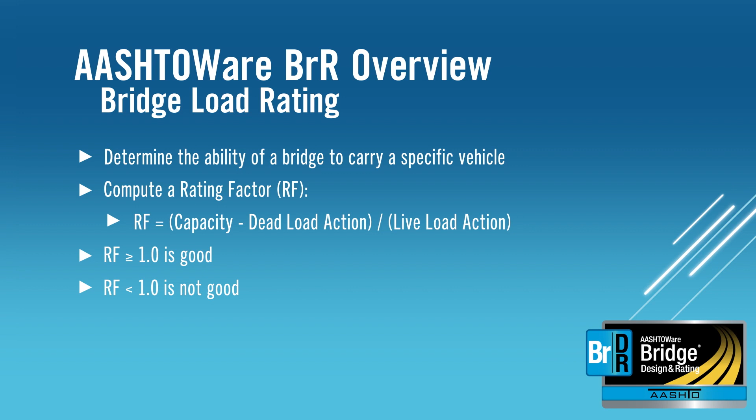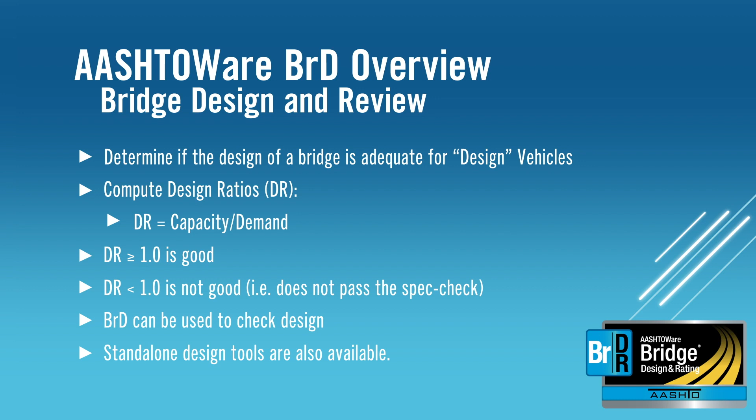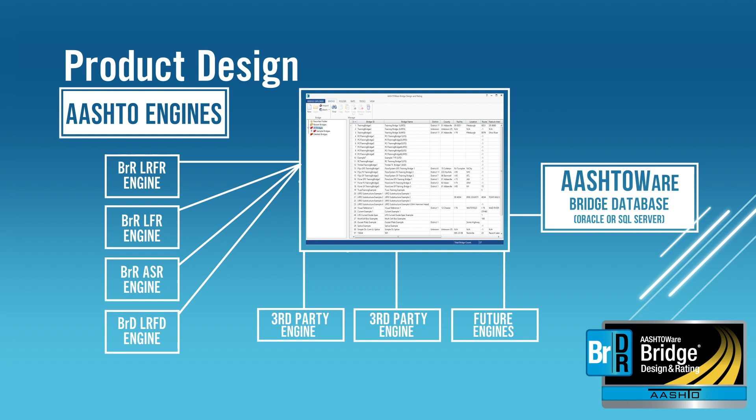This slide shows a representation of the general architecture of the system. In the center is the user interface where the user enters data describing the bridge. The data that a user enters is stored in a database, which is either Oracle or Microsoft SQL Server. The database is designed to hold a three-dimensional description of a bridge. Having three-dimensional data entry allows the data to be used by multiple analysis engines and multiple versions of the specifications without needing to change any input. On the left-hand side are the AASHTO engines delivered with the software, which are LRFR, LFR, ASR, and LRFD analysis engines. Third-party engines such as BRASS and LARS, for example, are also supported. The results generated by the analysis engines are viewable within the user interface.

This slide outlines the analysis process in the software. In the first step, the user input represents the physical model of the bridge with dimensions and material properties. Then the user launches an analysis which generates a mathematical finite element model of the bridge from the physical model. The finite element engine processes the finite element model and determines the displacements and actions such as moment and shear acting on the structure. For vehicular loads, influence lines for 2D analysis and influence surfaces for 3D analysis are loaded to determine the live load actions on the structure. The next step is spec checking, which uses the physical model to calculate the capacity at each requested location to determine either the rating factor or the design ratio based on the analysis request.

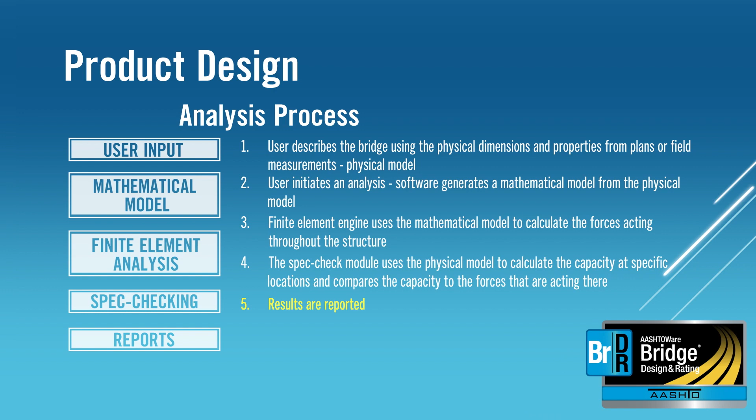Reports are generated based on each of the analysis and reports requested through analysis. The development cycle for new features in the software starts with task force approval and requirement gathering. Design documents such as UI mockups and flowcharts are then created. The task force and BETA TAG, which is a technical advisory group composed of state agency employees who use the software, reviews and approves the design documents.

Software development then starts, and is alpha tested using agile software development methodology. Alpha testing is performed by engineers with bridge load rating and design experience. The software is then tested by the BETA TAG. After all features have been alpha and beta tested and the BETA TAG approves the acceptance build, a new version of the software is finally released.

AASHTOWare BrDR supports the Microsoft SQL Server and Oracle relational databases. The language used for development is C# with .NET Framework platform. All data entered by the user is stored in database tables. The system contains more than 1,000 windows, more than 800 database tables, and more than 10 million lines of code.

Now we will discuss the 4 major components of the software, which includes the Bridge Explorer, the Library Explorer, the Configuration Browser, and the Bridge Workspace. The Bridge Explorer is designed like the Windows File Explorer, with folders shown on the left-hand side and bridge files on the right. The bridges are organized as a list by their bridge IDs, which can be subdivided into different folders. There is a search feature to find bridges based on a few identifying criteria.

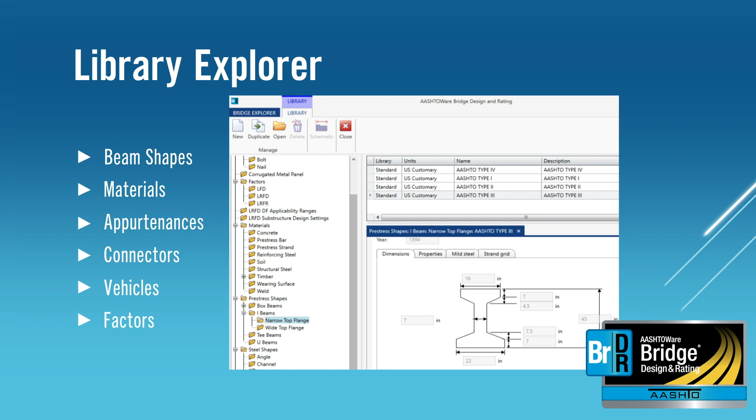The library also contains materials from the AASHTO standards and vehicles based on the LRFD design specifications and the Manual for Bridge Evaluation. The library also contains load and resistance factors from the LRFD design specification and the Manual for Bridge Evaluation. The Configuration Browser is mainly used by administrators of the software. Administrators can add users, set privileges, and enter parameters such as names of counties and districts. Administrators can also enter agency-related system defaults, like the default specification to use and tolerances.

The Bridge Workspace is where all the work is done related to defining components of a bridge, defining the bridge geometry, and analyzing a bridge model. As mentioned before, the 3-dimensional model of the bridge can be entered. In this system definition model, all the loads acting on each member can be computed by the software. The software also computes the live load distribution factors for each member based on the relative location of the member.

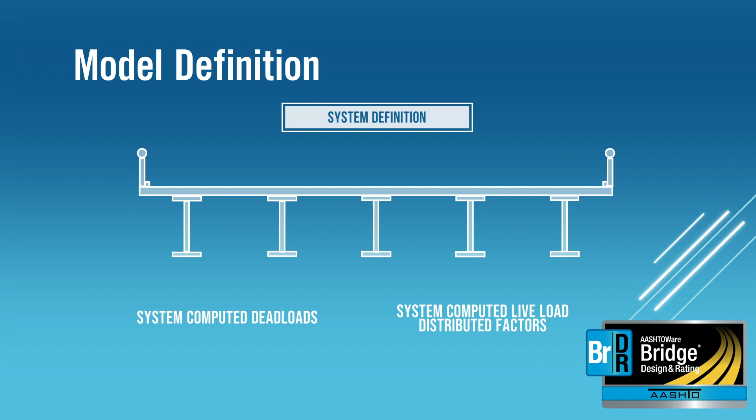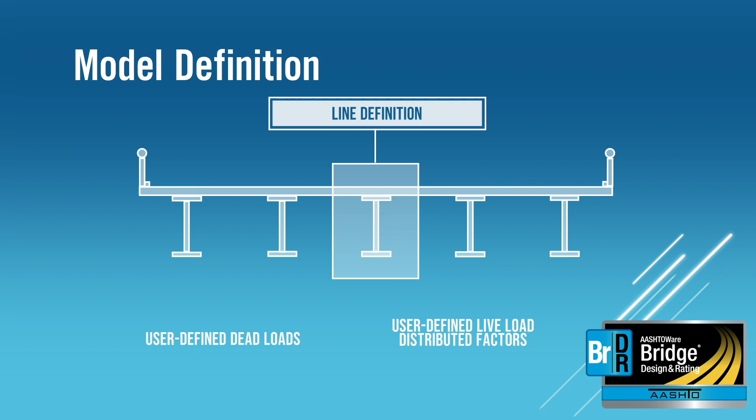For the few types of bridge geometries not supported by the software, a line definition model can be used. In a line definition model, the user is responsible for entering the dead loads and the live load distribution factors. Now we will talk about some of the capabilities of the software. The software can compute LRFD design review or design, capacity computation using LRFD and rating with LRFR, capacity computations with LFD and rating with LFR, and capacity computations using ASD and rating with ASR.

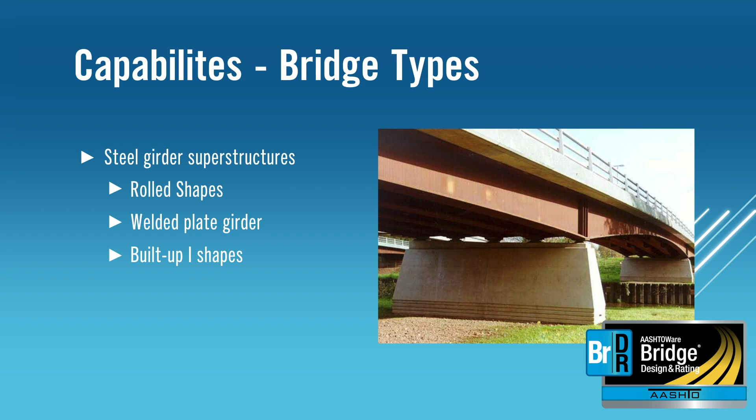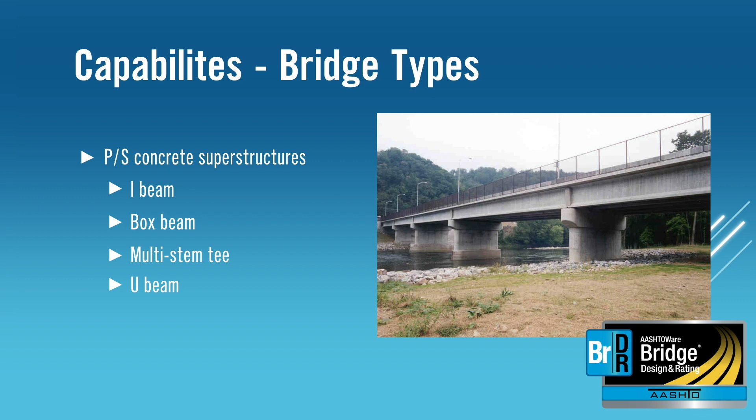A member alternative analysis setting allows the user to specify a load rating type, such as LRFR, LFR, or ASR for each member alternative, and then launch an analysis where some members of the bridge are rated by one method, such as LRFR, and other members of the bridge are rated by another method, such as LFR. In terms of steel bridge types, BrDR supports rolled shapes, welded plate girders, and built-up I-shapes. For prestressed concrete beam types, BrDR supports prestressed I-beams, box beams with both rectangular and circular voids, multi-stem T and U-beam shapes.

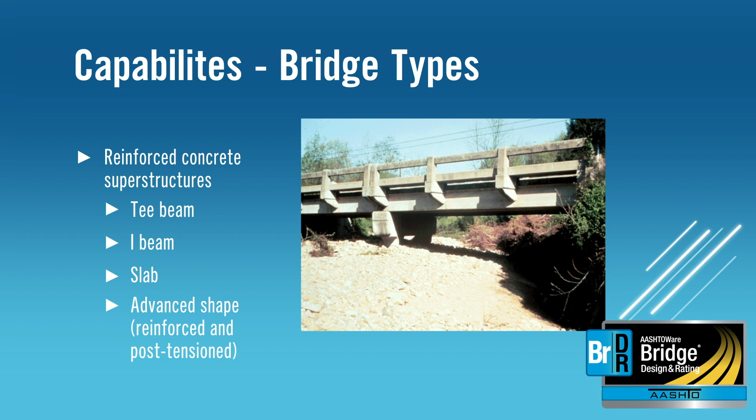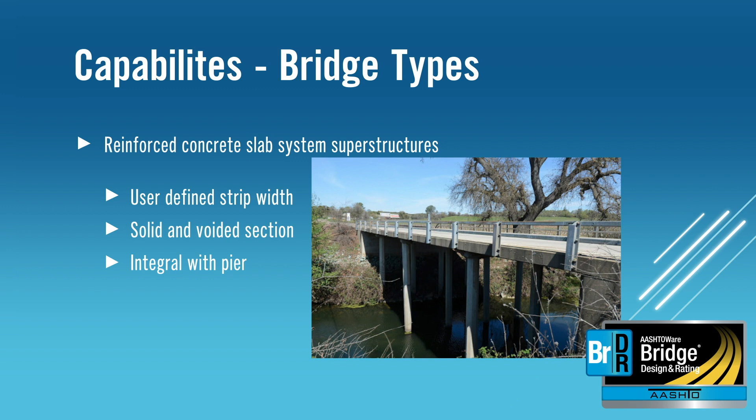For reinforced concrete beam types, BrDR supports T, I, and slab beams. From version 7.1 onwards, it will also support a reinforced concrete advanced shape, which can either be reinforced concrete or post-tensioned. BrDR also supports reinforced concrete slab systems with solid and voided sections. A user-defined slab strip width can also be defined for evaluation, for which the live load distribution factor and the load will be proportioned. Slab integral with pier is also supported for analysis.

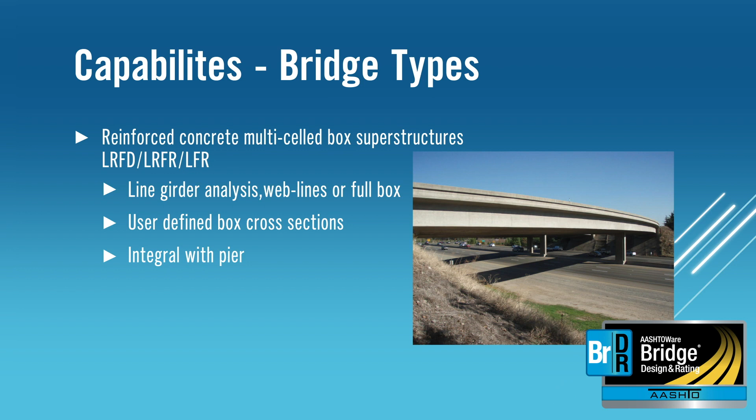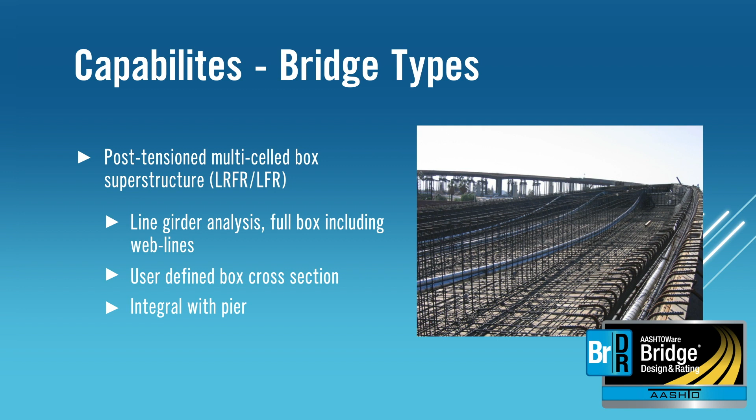Reinforced concrete multi-cell box is supported for LRFD, LRFR, and LFR. Either web lines or the full box can be analyzed. Multi-cell box also supports analysis with integral pier. Post-tension multi-cell box is also supported for full box along with web lines evaluation. Post-tensioned multi-cell box also supports integral with pier analysis.

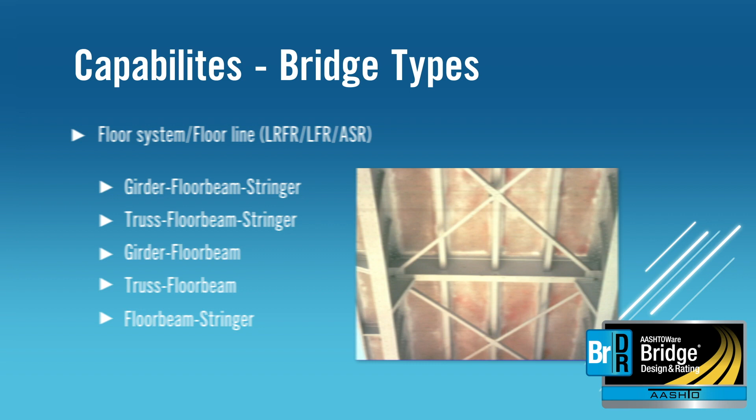Analysis of floor system bridges is also supported for LRFR, LFR, and ASR analysis. The following floor system configurations are supported in the form of system or line superstructure definition: girder floor beam stringer, truss floor beam stringer, girder floor beam, truss floor beam, and floor beam stringer. Floor truss in floor system is also supported for LFR only.

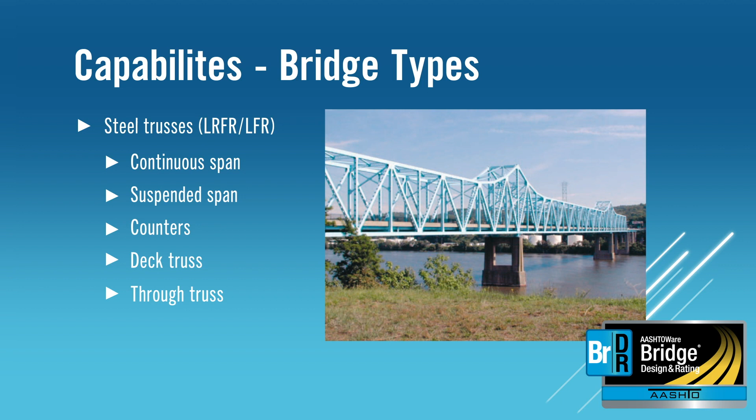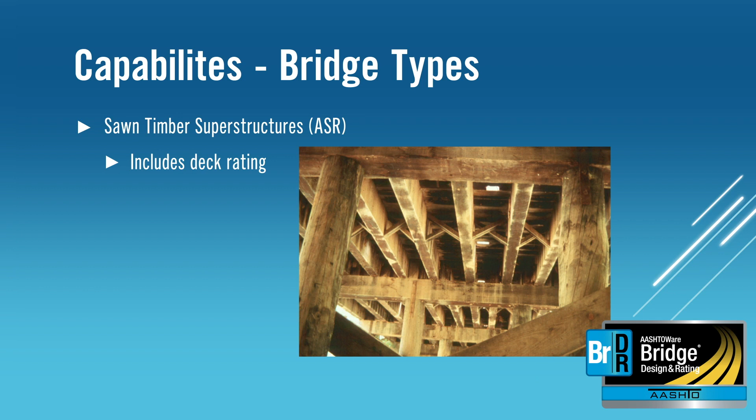Steel truss bridges can also be evaluated for LRFR and LFR. The following types of steel trusses are supported: continuous span, suspended span, truss with countermembers, deck truss, and through truss. Sawn timber beam analysis is supported, including timber deck rating. This analysis is only supported for ASR. The timber analysis is performed using the third-party engine Madero.

Reinforced concrete box culverts are supported as well for LRFD, LRFR, and LFR analysis. Configurations with sloping fill multiple cells are supported. The software also supports culverts with or without bottom slabs and haunches.

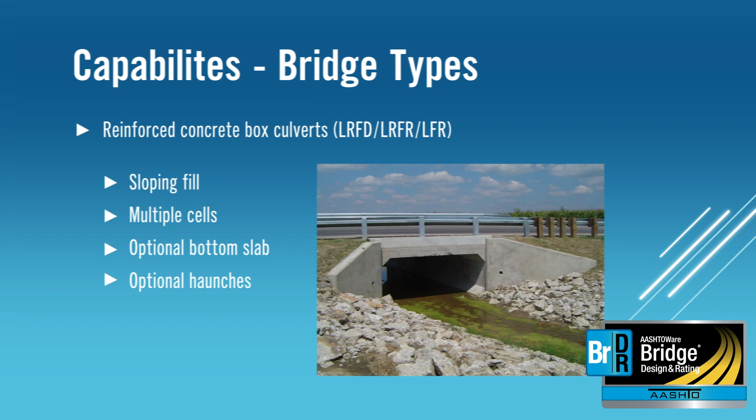The BrD application also supports pier design review analysis for multi-column frame piers, solid shaft piers, pile bent piers, and wall piers. Foundation types include spread, pile, and single drilled shaft foundations. Foundations are not added to the FE model but are evaluated for specification checking. Nonlinear analysis is performed for single drilled shaft foundations.

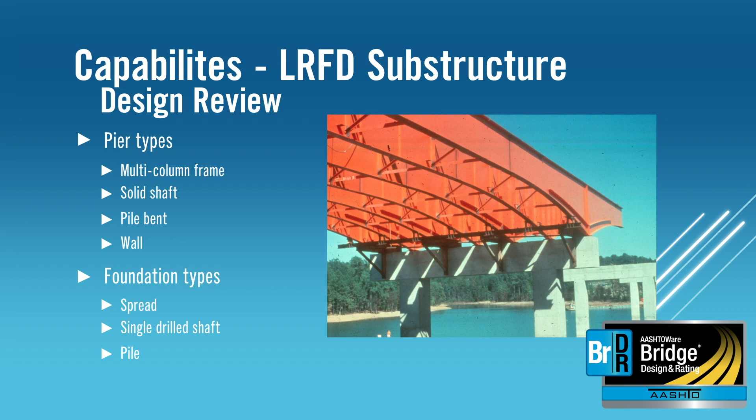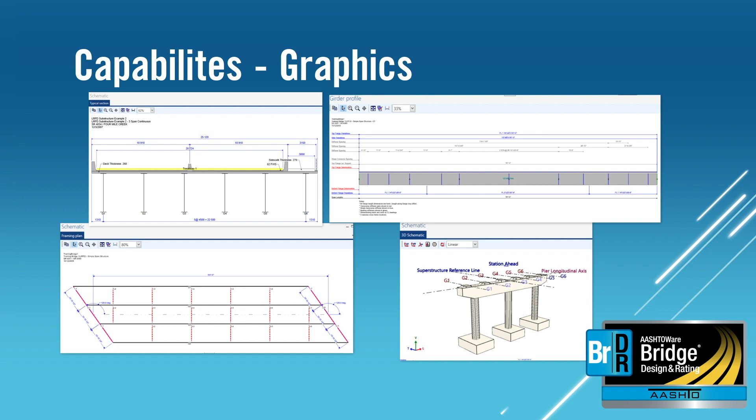The software provides graphics to validate entered bridge models as seen here. The top left is the structural typical section, followed by the member elevation on the top right, the framing plan on the bottom left, and a multi-column frame pier on the bottom right corner. There are other additional schematics available that are not shown here.

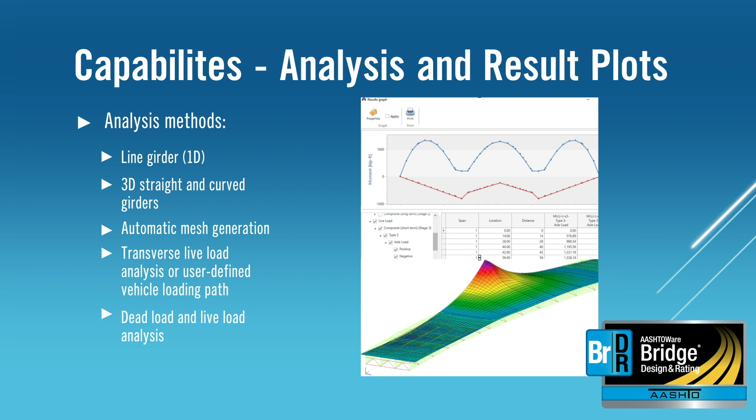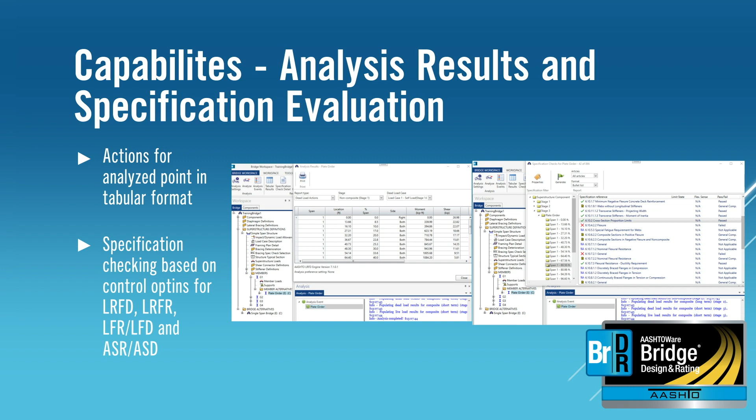This slide shows the analysis plots available for one-dimensional and three-dimensional analysis. Also, the software generates the mesh for the finite element model automatically. Transverse live load analyses are performed to position lanes and trucks inside those lanes within the travelway, which is then used for influence surface loading. Each point analyzed by the software has actions which are reported in the form of tabular results as shown. Detailed specification checking for each point of interest for all analysis types is also available as shown on the right-hand side. Now we will go over the advantages of using AASHTOWare BrDR.

Design review and load ratings can be performed using one user interface and one set of data, which can improve productivity of the engineers through the lifecycle of the bridge model. Bridge models are stored in the relational database, which provides data integrity and can be backed up occasionally. The administration of an agency's bridge inventory becomes simplified through one product.

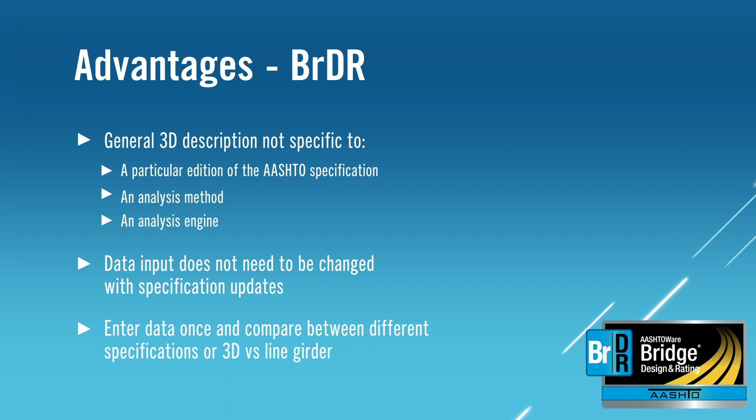The software allows 3D descriptions of bridge models, which can be used with multi-versions of AASHTO specifications, analysis methods, or analysis engines. This also provides the flexibility to compare analysis results between the line girder and 3D analysis. Research can be performed using the software to evaluate proposed changes to the AASHTO specification by making changes and comparing results before production use.

Licensing agencies can request new features by using service units. Users can vote on the top 10 features they would like to include in the software. There is a technical advisory group, TAG, which advises and reviews how the feature should be implemented in the software.

Third-party developers can develop their own analysis engine by taking advantage of the Engine API. Third-party developers can develop plugins using Domain API to exchange bridge data with their software. Third-party developers or a permit routing analysis can use the Analysis API to run analyses using the AASHTO engines without opening the user interface.